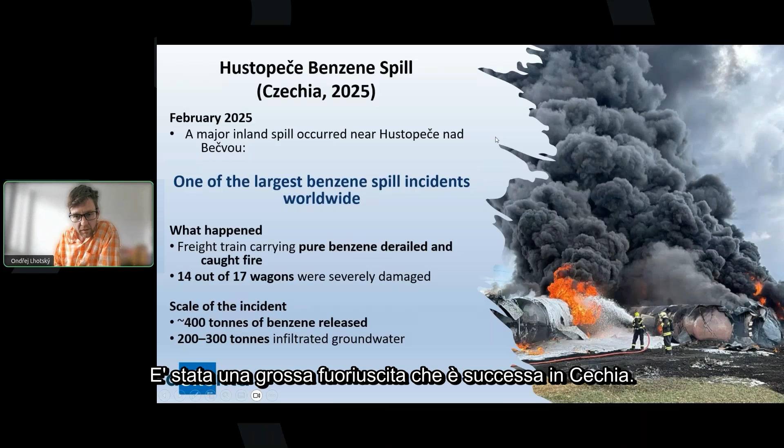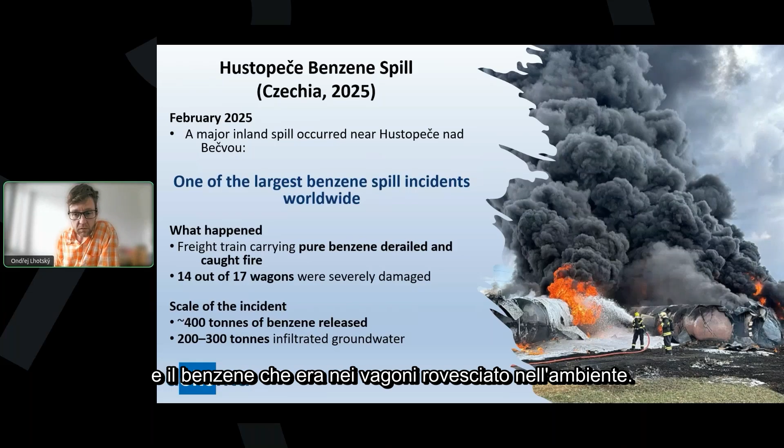It was a big spill that happened in Czechia. It happened in February 2025 when a train carrying pure benzene from the manufacturing site derailed and caught fire. 14 out of 17 wagons carrying benzene were severely damaged, and the benzene in the wagons spilled into the environment.

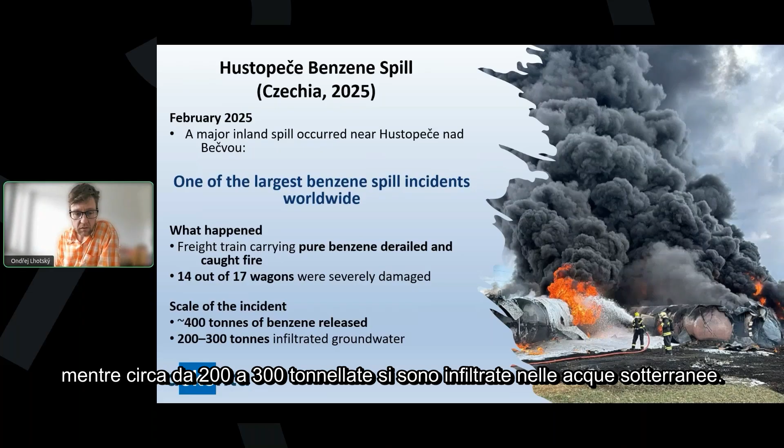The estimate is that about 400 tons of benzene were released, while about 200 to 300 tons got infiltrated into the groundwater.

This incident was actually the biggest benzene incident ever recorded in Europe, and as benzene migrated very quickly into the subsurface and into the groundwater, we've seen very early impacts of benzene in surroundings.

Benzene was detected in the nearby lake about 100 meters from the incident site already a few days after the incident. So this underground migration was extremely fast, and there was very significant risk both to human health and environment.

And that's why the DEKONTA company was called to the site by the authorities, as we are the only company in Czechia that combines both the emergency response and site remediation services.

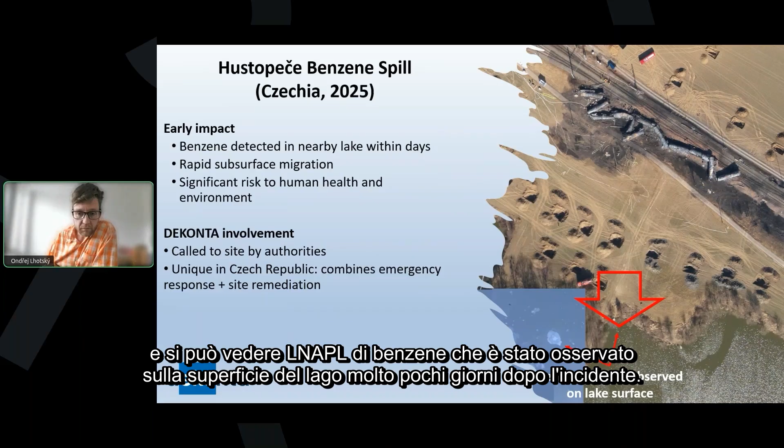On this picture on the right side, you can see the aerial view of the site where you still have the incident site, and you can see the benzene LNAPL that was observed on the lake surface very few days after the incident.

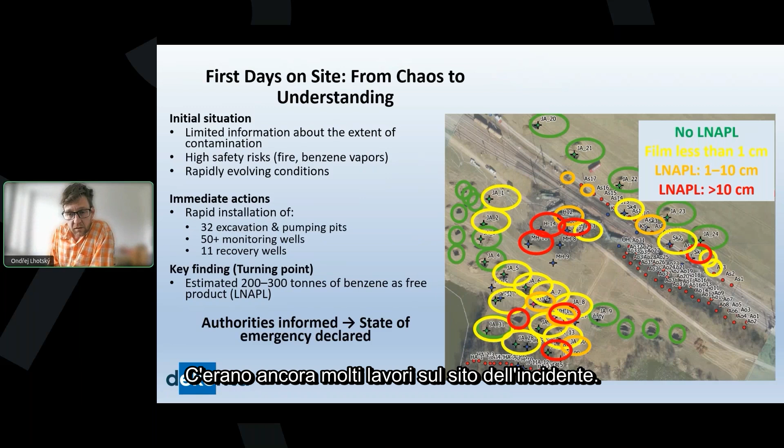We were contacted by the authorities. We came to the site, and it was a complete mess. There were still a lot of works going on at the incident site. The wagons were still present, and they were being taken care of by the National Fire Service.

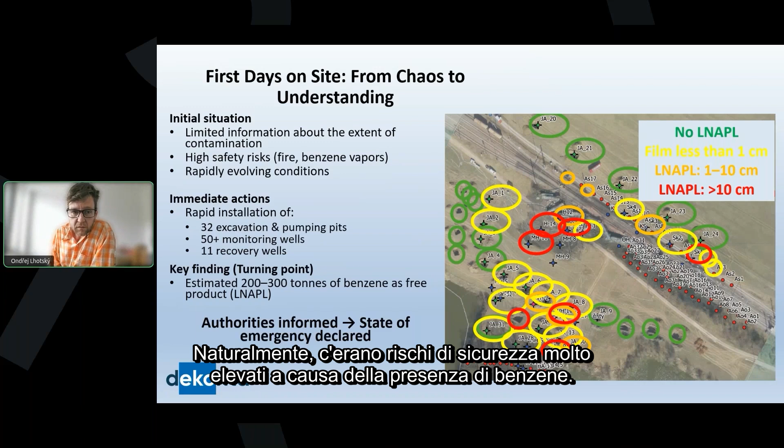And we knew that benzene was migrating towards the lake, so we needed to collect as much information as was possible. Of course, there were very high safety risks due to benzene presence. Benzene is, of course, very toxic. It's actually carcinogenic, and its vapors are highly flammable, with a high risk of explosion.

So the early days on the site were very hectic, and we had to use all the protective equipment that can be used in such cases. In addition to that, the situation was evolving very quickly, so we needed to assess the situation and get all the information possible as soon as possible.

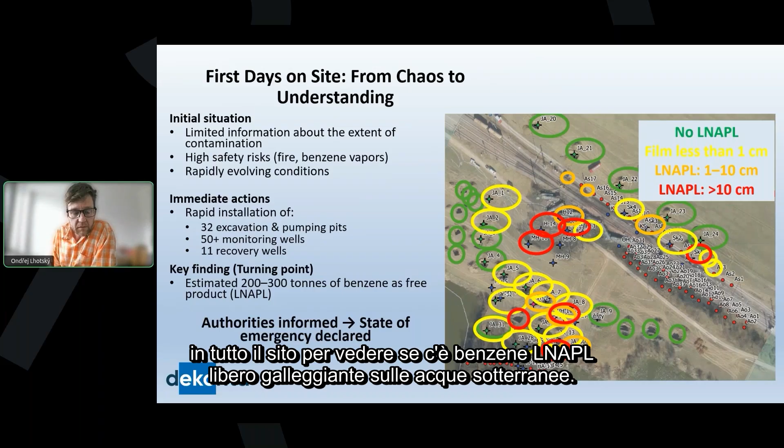And we decided to do that via excavation and installation of combined survey and pumping pits throughout the site to see if there is free benzene LNAPL floating on the groundwater. Of course, we also started installing monitoring wells, and we already started also with installation of some recovery wells.

The main finding we had after several weeks was this estimation that there is about 200 to 300 tons of benzene present, floating on the groundwater in form of LNAPL. And we informed the authorities about this.

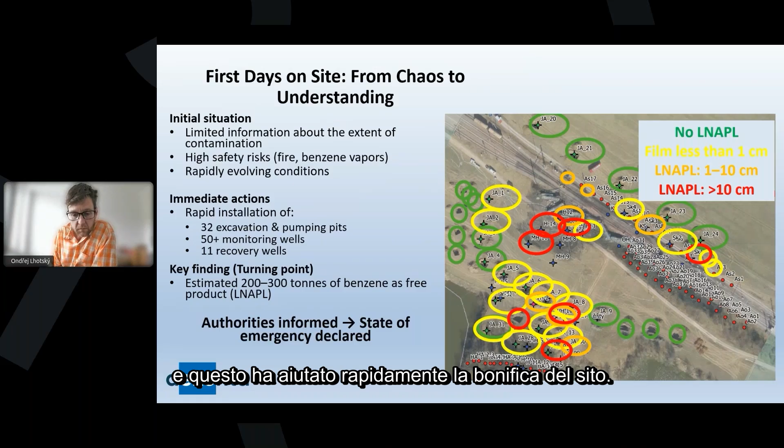And later on, the state claimed a so-called state of emergency, and this helped rapid remediation of the site.

As Jack mentioned, this was not a typical oil spill. The properties of pure benzene are, of course, different compared to normal oil. It's highly volatile, toxic, and explosive, as I mentioned, so there were very high risks for the site personnel, and it has also very high mobility in the subsurface.

Its sorption on the soil materials is relatively low, and it has very low viscosity. And speaking about organic solvent, it has relatively high solubility, so it was rapidly partitioning into the groundwater.

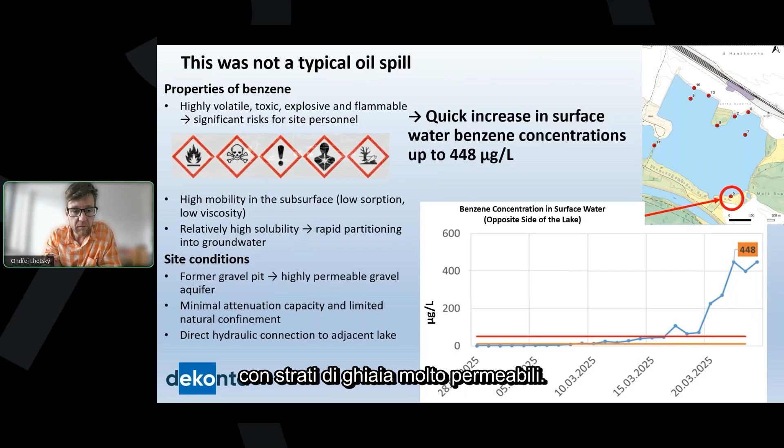In addition to that, the site conditions were very favorable for a very quick mobilization or flow of the benzene in the subsurface, as the site was actually a former gravel pit with very highly permeable gravel aquifers. It had minimal attenuation capacity, and there was direct hydraulic connection to the adjacent lake.

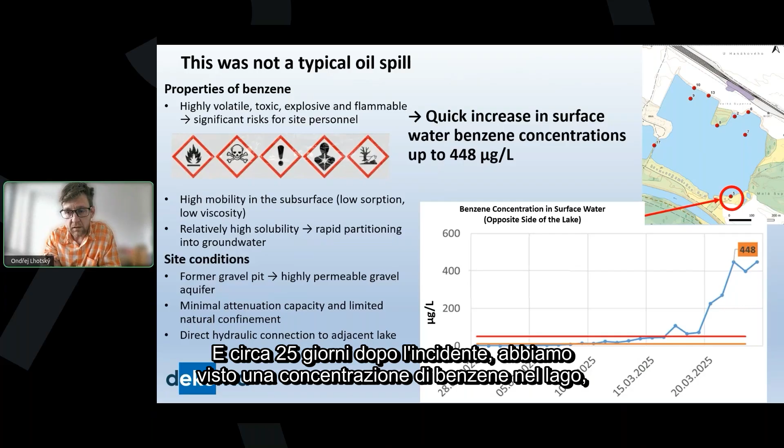This quick increase or quick migration of benzene into the lake resulted in a quick increase of benzene concentrations in this lake, and about 25 days after the incident, we've seen a benzene concentration in the lake around 450 micrograms per liter.

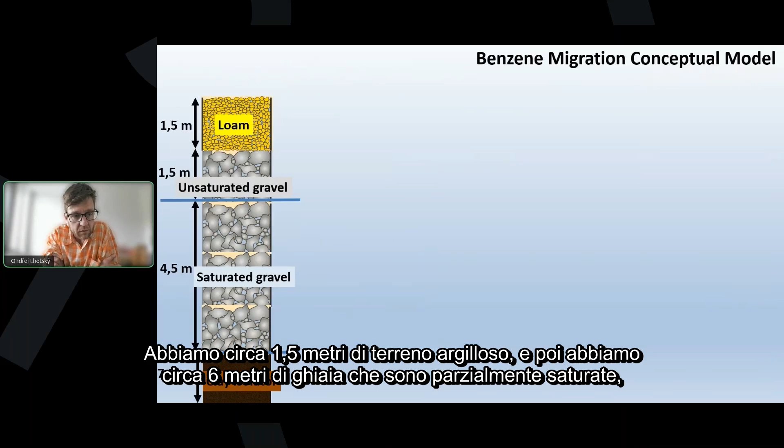Just to explain how this could have happened, here is a short presentation of our benzene migration conceptual model. On the left hand, you can see the geology of the site. We have about 1.5 meters of loam, then about 6 meters of gravels that are partially saturated, and then a clay insulator.

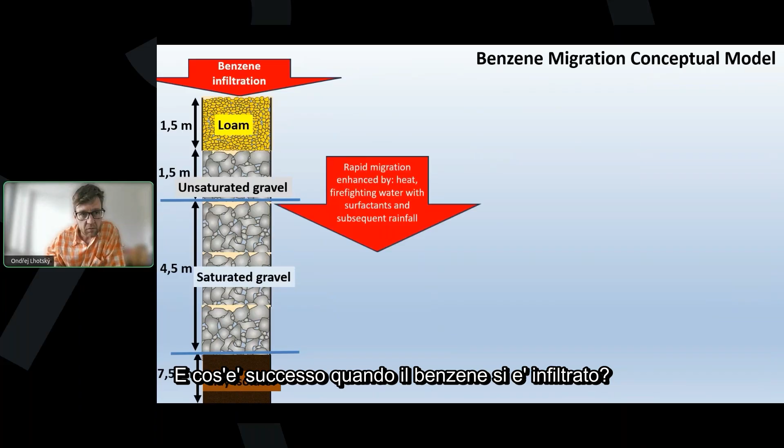What happened when benzene was infiltrating, we had huge benzene lagoons close to these wagons, and this benzene was rapidly migrating downwards, not only because of its gravity, but also because of elevated heat caused by the fire and firefighting water and surfactants that were sprayed over these lagoons, which were basically pushing the benzene level downwards.

Then when benzene reached the groundwater level, it accumulated there and created a free product layer, and part of this layer was dissolving into the groundwater, but it was also floating along the groundwater table downwards, dissolving into the groundwater also along the way.

So it was spreading very quickly towards the lake, mainly in form of free product, but also in form of solution in groundwater.

The groundwater migration towards the lake is also quite significant, but it's not as quick as the migration of pure free product on the water table.

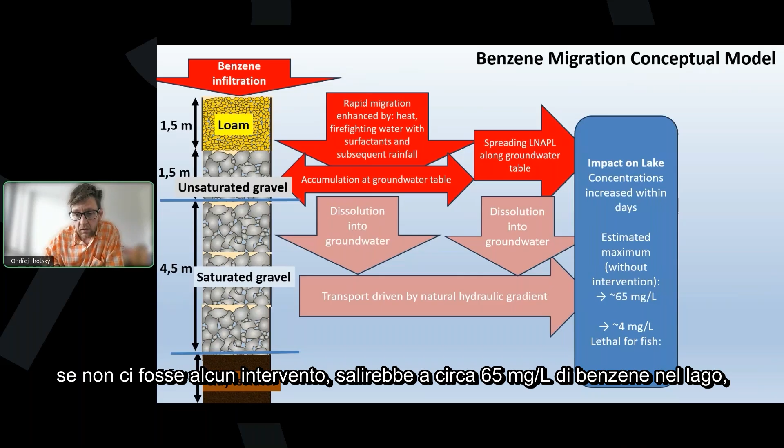And when this benzene got into the lake, it got dissolved in there. We estimated that the maximal concentration of benzene in the lake, if there was no intervention, would go up to about 65 milligrams per liter, while already about 4 milligrams per liter are lethal to fish. And the spreading, as I mentioned, was very quick.

We've seen benzene in the lake spread about 100 meters in very few days. And then this lake is connected to another lake and then to a river ecosystem, and there would be quite significant downstream impacts on these as well.

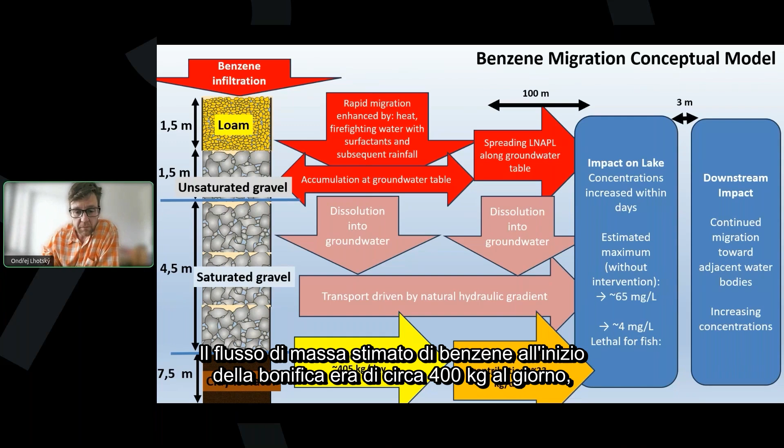The estimated mass flux of benzene at the beginning of the remediation was about 400 kilograms per day, and the secondary source migration was around 23 kilograms per day. And then we would have migration of about 4 kilograms per day to the downstream area.

We presented this uncontrolled migration scenario to the authorities. We warned them that the surface water in this first lake can increase up to 65 milligrams per liter, which would cause actually acute toxicity not only to the lake environment, but it would also be toxic in the surroundings, as benzene will evaporate from the lake and there will be toxic vapors all around.

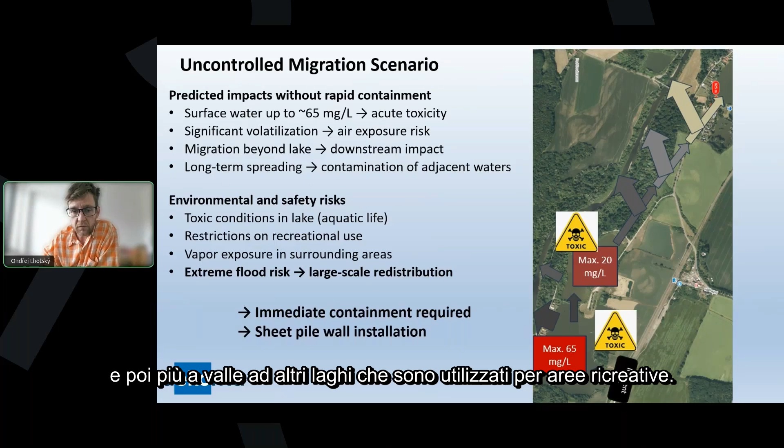And it was clear that even the downstream lakes will have very high benzene concentrations and will become toxic. And there was a potential that the benzene will also migrate into the nearby river and then farther downstream to other lakes that are used for recreational areas.

So the risks were very high, and there was another huge risk that there will be floods coming, and this flood risk would cause large scale redistribution of all the benzene that was present downstream, with potentially very disastrous results.

So it was decided that there is immediate containment necessary to stop the migration of benzene downwards. And we decided that we will install a sheet pile wall on the site to prevent the downstream migration.

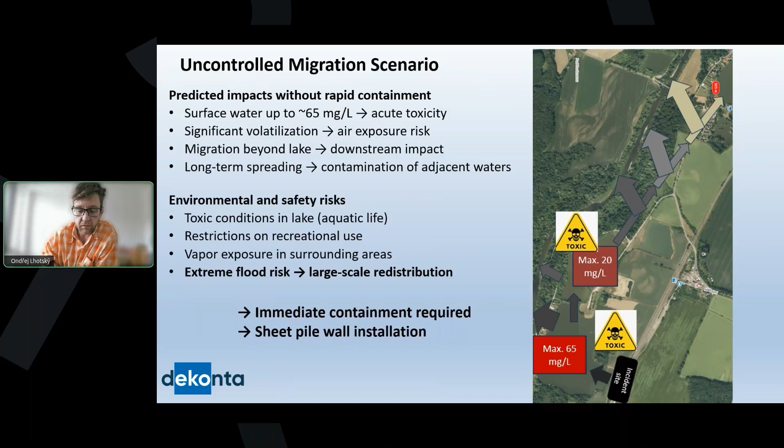This sheet pile wall installation started already in March, and it was finished after 43 days after the incident. It was extremely quick. The sheet piles were taken to the site from all around Europe, and the sheet pile wall was installed in order to contain the majority of the benzene contamination present on the site.

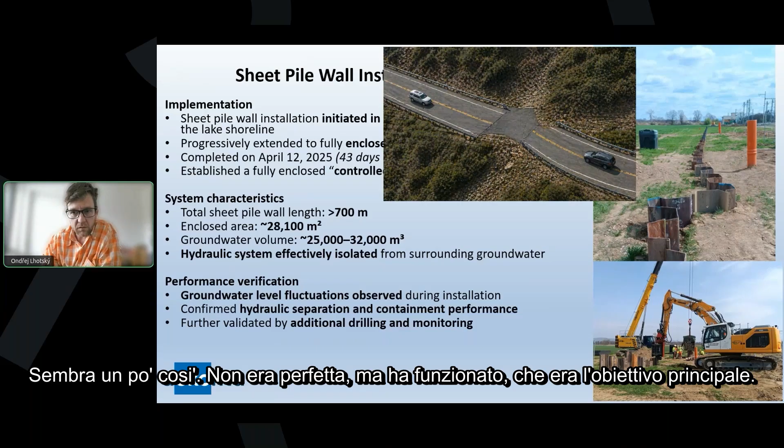This sheet pile wall length was about 700 meters, and the enclosed area was around 28,000 square meters. The groundwater volume inside this controlled area was around 25,000 to 32,000 cubic meters, and we knew that the hydraulic system inside was effectively isolated from the surrounding groundwaters.

We also knew that there were different groundwater levels outside and inside the sheet piles, so the performance of the sheet piles was verified, and we confirmed that the sheet piles worked as a containment for the benzene LNAPL, although they don't seal 100%. There is still some groundwater migrating through the sheet piles. The LNAPL migration was basically stopped thanks to the sheet pile installation.

Concerning the mass balance that we did after the sheet pile wall installation, we've estimated that we had about 220 to 400 tons of benzene captured in the controlled area. This means that about 96% of benzene that was released was contained inside this controlled area. When we looked at the distribution of the contamination, a majority of it was present in the form of LNAPL that was gradually dissolving into the groundwater. Only about 10% was present dissolved in the groundwater at the time, and we had 10 to 15% retained in the soils.

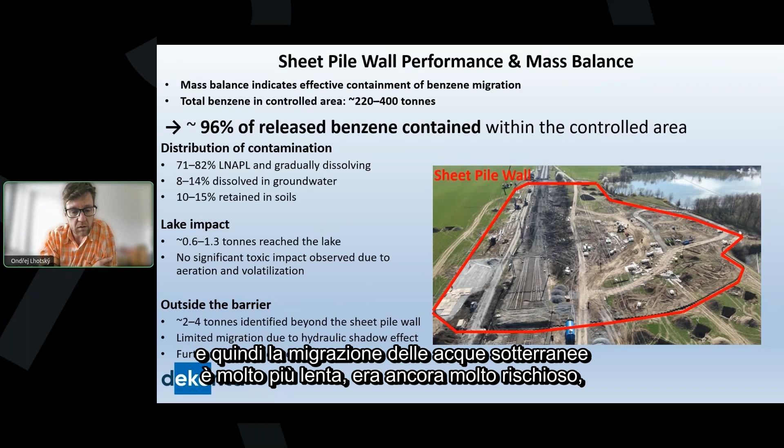In addition to that, we knew that there were about 2 to 4 tons of benzene that migrated downgradient from the controlled area before the sheet pile wall was installed. Although further migration was limited thanks to the so-called hydraulic shadow effect of the sheet piles, basically shading the groundwater downgradient so the groundwater migration is way slower, it was still a very high risk, and we knew we had to investigate this issue further.

We were also asked by the authorities to prepare a so-called emergency remediation strategy, basically a document that will guide us through the remediation. We developed it very quickly, within about 7 days. At the beginning, it was intended to last for 6 months, but now the remediation was extended to 20 months, and there will be follow-up remediation projects prepared later on.

The key objectives of this emergency remediation strategy were mainly, of course, containment of the benzene and effective benzene removal from the groundwater, and mainly the benzene that was floating in the form of LNAPL on the groundwater, but it was also important to rapidly restore the railway and to investigate and monitor the site in detail. We also wanted to minimize both the environmental and financial risks and optimize the remediation efficiency.

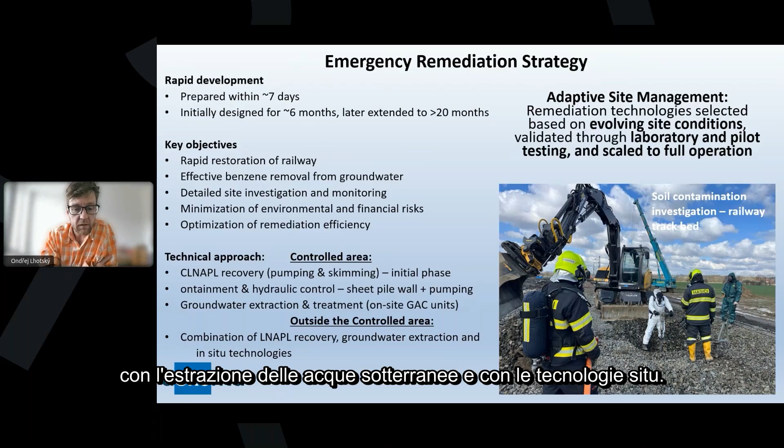In the areas outside of the controlled area, we decided to combine LNAPL recovery where LNAPL was present, groundwater extraction and in situ technologies. And we tried to focus on adaptive site management. We proposed that we will think about different technologies that can be used on the site based on its evolving conditions, validate these through laboratory and pilot testing, and then scale them up to full operation.

So the first thing I will touch on briefly was soil contamination and the railway restoration. Basically, what we found was that luckily the highly contaminated soil layer beneath the railway was relatively narrow, and the amount of soil that needed to be excavated was relatively small. So we basically moved this contaminated soil to the site where the soils were highly contaminated, where the lagoons with benzene were present earlier, and we covered these contaminated soils with bentonite and left it on the site.

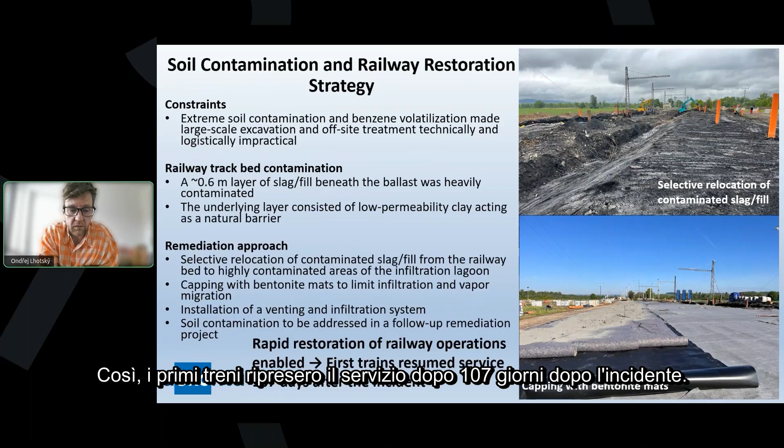Concerning the LNAPL recovery and pumping, we were directly pumping the benzene from our excavation pits and later our recovery wells, and we were combining the pumping with skimming to enhance the amount of recovered LNAPL, and we transported the recovered benzene to the producer facility where the benzene was produced originally. It's actually only 10 kilometers away, so it was quite convenient for us to transport it there.

There were, of course, a lot of operational challenges, as the benzene LNAPL created emulsions with the groundwater, a sort of milk-like looking liquid, and there were high safety risks during the handling and disposal of the benzene, of course. But within about a month, we were able to pump out the majority of LNAPL that was present on the site, and to remove about 100 tons of LNAPL, and the rest of the LNAPL was quite quickly dissolving into the groundwater, and it was not really possible to pump it out anymore.

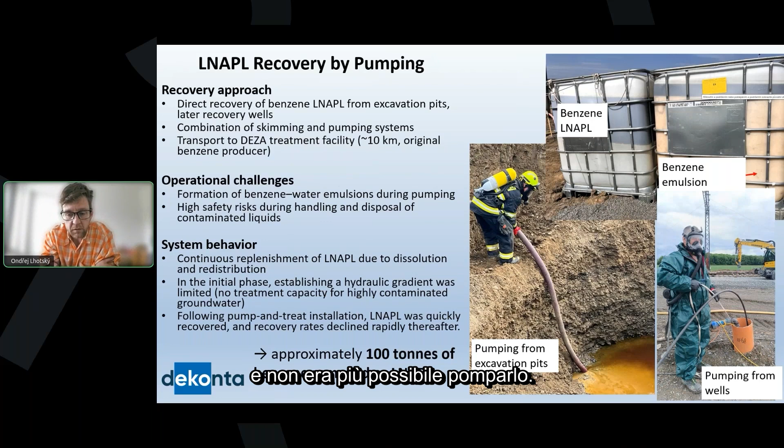Concerning the pump and treat system that was installed on the site, there were about 70 extraction wells installed in the controlled area, and they were used periodically to pump the groundwater with dissolved benzene out, and this water with very high benzene concentrations was treated on high capacity granulated activated carbon filters. We had 3 filters on the site, or we actually still have them there. Each unit contains about 20 cubic meters of activated carbon, which is about 10 tons.

And we are always pumping the highly contaminated groundwater through the first filter, the so-called high load filter. Then we polish the groundwater in the second filter, that is installed in series after the first filter, and then the last filter is on standby. It's actually empty, and every time our high load filter gets fully saturated by benzene, there is a car coming that brings new, fresh, reactivated granulated activated carbon. This carbon is injected into the standby filter, and the contaminated activated carbon is pumped out from the high load filter, and it's taken to Austria for reactivation, and we can continue pumping.

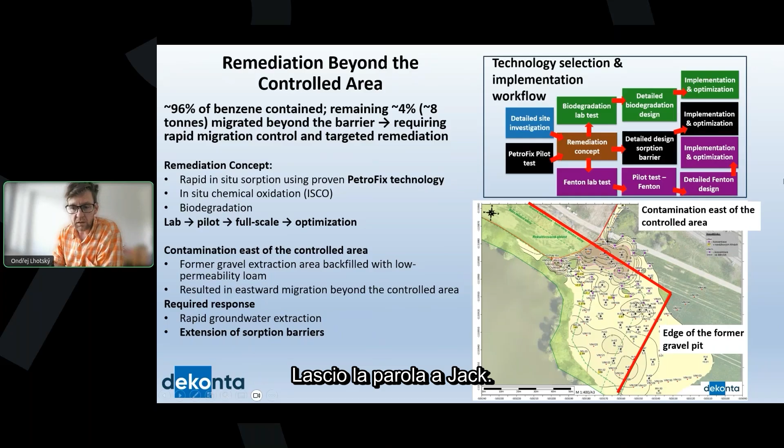What we didn't know earlier was that there was some contamination present also in the east area of the controlled area, as the former gravel extraction area was bigger than the current lake, and the gravel was excavated in these areas as well, and then it was backfilled with low permeability loams, and this resulted in eastward migration of benzene also this way. So we were also asked to rapidly react to this situation and to extend the sorption barriers we installed. And this brings me to Jack.

And then as different parts of the site required different technologies to essentially stop the spreading and reduce the risk posed by this spill, this is where colloidal activated carbon, of which PetroFix falls under that umbrella, came into the wider remediation strategy. So the part of the talk I'm going to do is just introduce you to this concept of colloidal activated carbon, the product PetroFix, and then how it works in the subsurface once it's been applied. So colloidal activated carbon is typically applied through direct push injection, or you can inject it into fixed injection wells as well.

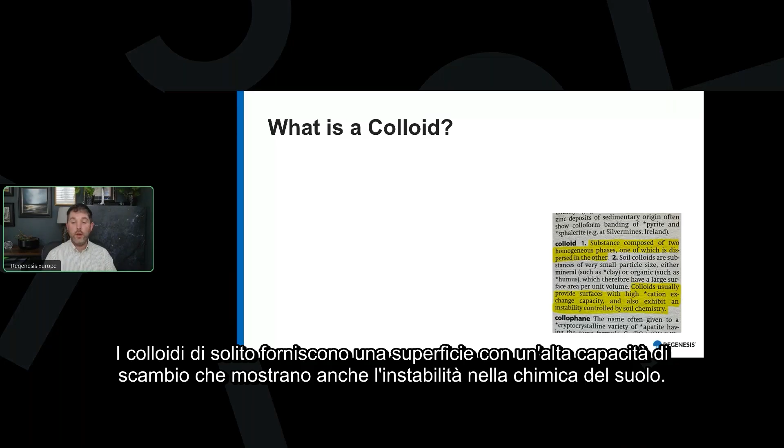So I'll start off with what is a colloid. A colloid can be defined as a substance composed of two homogeneous phases, one of which is dispersed in the other. So colloids usually provide a surface with a high cation exchange capacity that also exhibit instability in soil chemistry. So there's three types of mixtures: one is a solution, one is a colloid, and one is a suspension. The size of the dispersed phase for a colloid can be between 1 to 100 nanometers. Particles are often invisible to the naked eye and will only settle upon centrifugation, and these particles diffuse slowly.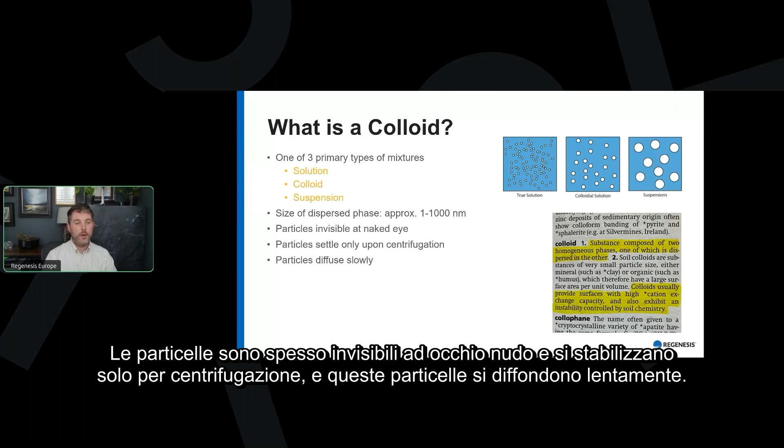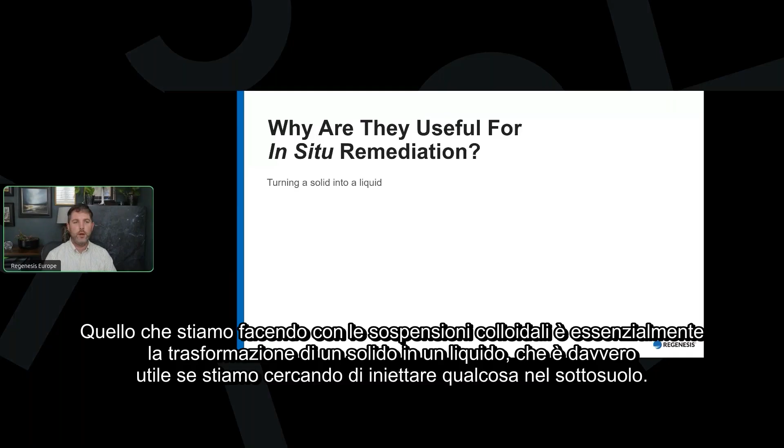Now, within our lives, we come across colloids all the time. So ink is a colloid, milk is a colloid, paint is a colloidal suspension, as is wine as well. So if you're thinking of colloidal activated carbon, it's something that looks very much like ink. It's something that looks very much like black coffee. So why are they useful for in situ remediation? So what we're doing with colloidal suspensions is essentially turning a solid into a liquid, which is really useful if you're looking to inject something in the subsurface. You want something that's going to really distribute well in the subsurface.

So we take a solid ingredient, and for our colloidal activated carbon range, we grind that down to 2 microns. So 2 microns is about the width of a red blood cell. So it's smaller than a pore throat in sand or silt. That isn't the end though, because you do not want these colloids to agglomerate. You don't want them all to stick together to clog up those pore throats. So we add a proprietary dispersing agent. So this ensures product consistency for storing and transport.

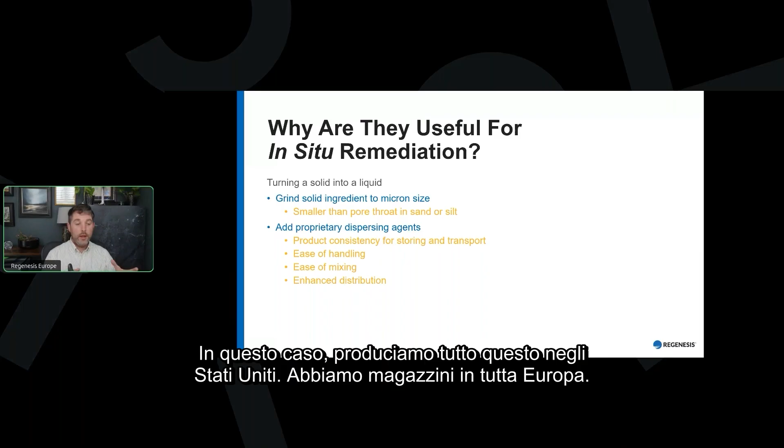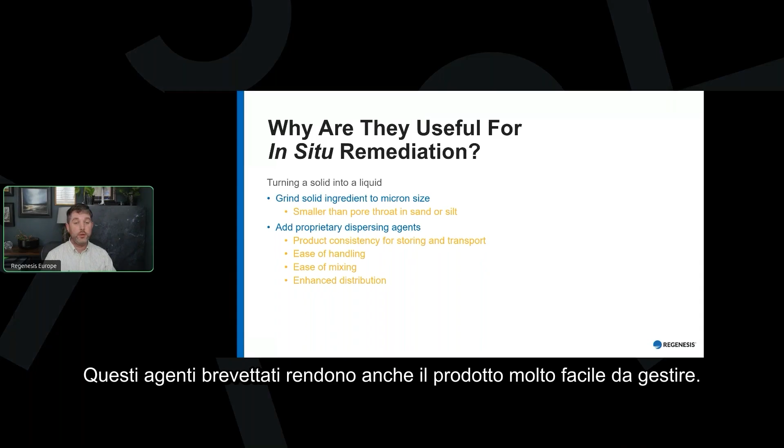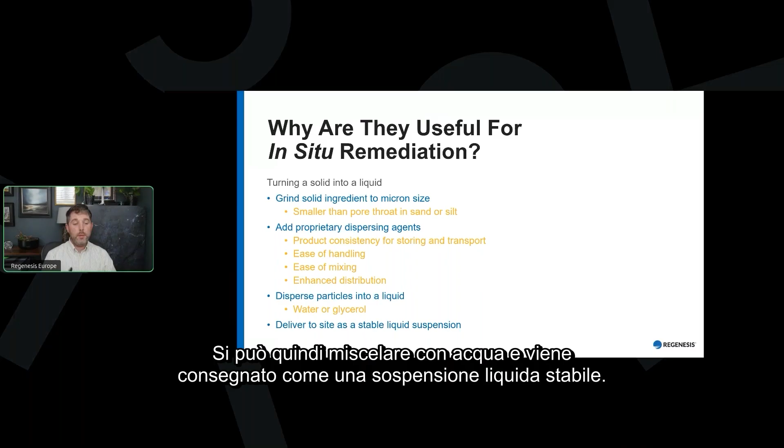So this proprietary dispersion agent coats these activated carbon particles that are 2 microns across, and that gives them all a slight negative charge, so that they repel each other, but they then stick to the aquifer matrix. You can then mix it with water, and then it's delivered as a stable liquid suspension.

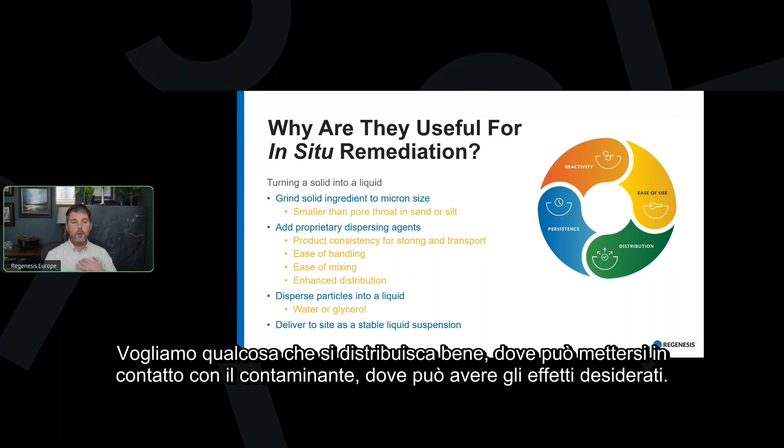So they're useful when it comes to in situ remediation, because when you're looking at different compounds that you might want to inject into the ground, I always think these are the 4 things you need to be considering. First of all, you need something that's going to distribute really well. We don't want to have a really dense injection grid. We want something that's going to distribute well, where it can make contact with the contaminant, where it can have the desired effect. So you want something that's going to distribute widely in the subsurface.

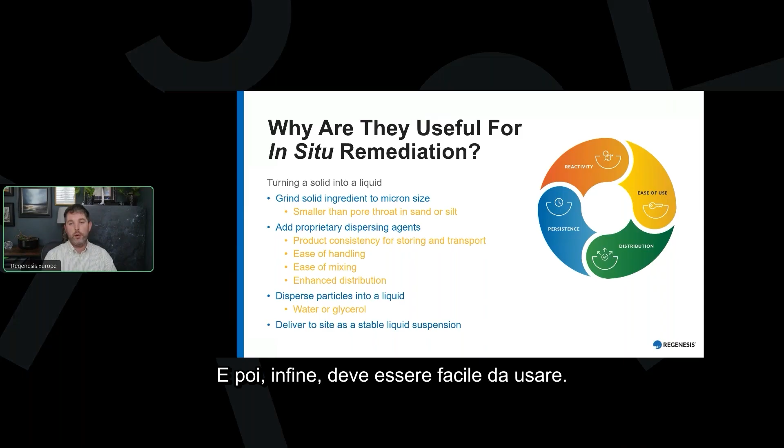You then want it to be persistent. So you need it to not wash out. You need it to stay where you've injected it, but then it also has to be appropriately reactive as well. And then finally, it's got to be easy to use. You know, for anybody that spent time in the field, ease of use on site is really important. And I also think ease of use and safety in the field is also important. So you want something that's safe and easy to use.

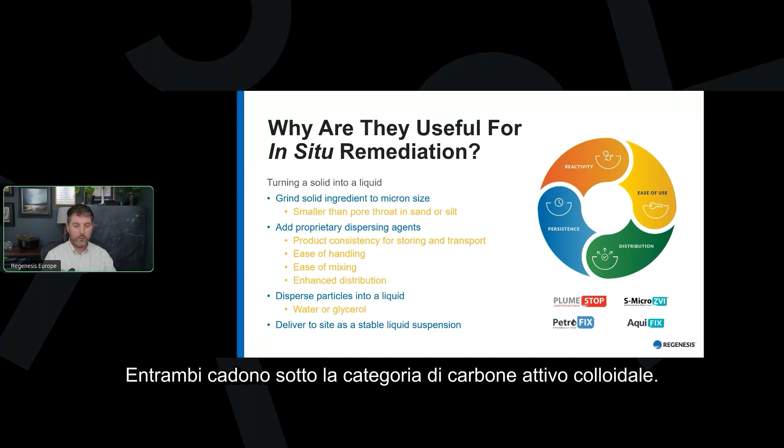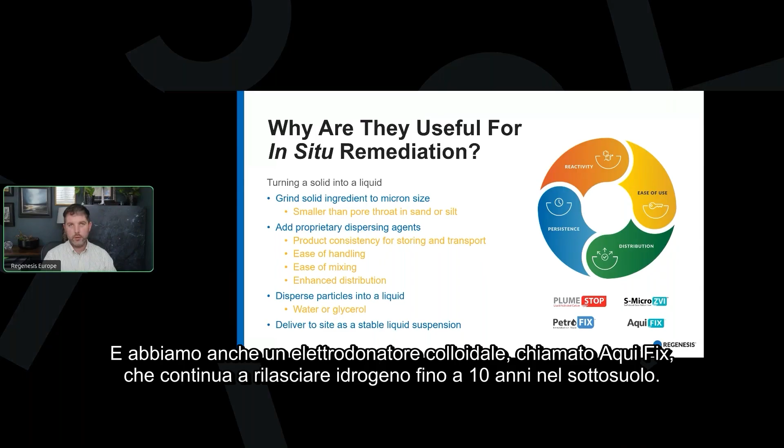So in Regenesis, we have a range of different colloidal technologies. So we have PlumeStop and PetroFix. PetroFix is what I'm going to be talking about as part of this presentation. They fall under the umbrella of colloidal activated carbon. We also have other colloidal technologies. So we have a colloidal zero valent iron technology called S-MicroZVI for in situ chemical reduction applications. And we also have a colloidal electron donor as well called AquiFix that continues to release hydrogen for up to 10 years in the subsurface. All of these are colloids.

Two of our products, PlumeStop and PetroFix, are colloidal activated carbon. We're going to focus on PetroFix because it was used on this site and it's used to treat petroleum hydrocarbons in the subsurface, where typically PetroFix is used for in situ adsorption and anaerobic biological degradation. In the case that Andre is discussing today, they actually went down the aerobic route with benzene.

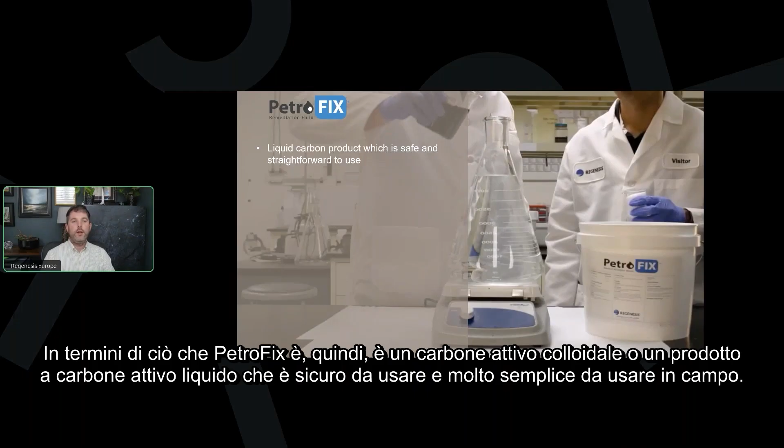In terms of what PetroFix is, it's a colloidal activated carbon or a liquid activated carbon product that is safe to use and very straightforward to use on site. So as I said, we've milled granular activated carbon down to 1 to 2 microns, coated it in a dispersion agent so that when you inject it into the subsurface, it distributes really widely. It's a very adaptable product. So in this case, it was used in a barrier application. Sometimes it's used to treat sources. At other times, it's used down service runs to stop offsite migration.

It provides really fast results. So it's used quite frequently in the spill response industry to stop the spread and reduce the risk of continued migration of contamination. And typically it's applied on sites where your hydrocarbon concentrations are at or near solubility limits, okay? What it can't do is it can't stop surface migration. So this isn't like a boom that you can just spray on the ground and stop surface migration. And it also cannot stop free phase either.

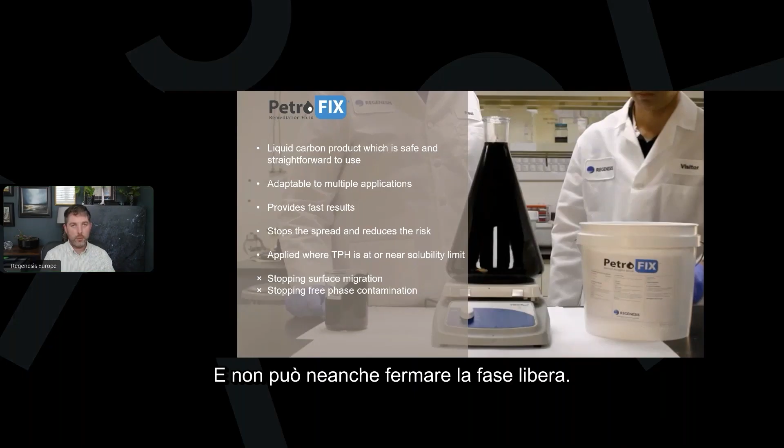And this is why, as Andre was talking you through this remediation strategy, where you do have free phase, some sort of pump and treat, some sort of excavation, some sort of stabilization is much more appropriate than using this technology. But it is a non-hazardous substance. So it's a very safe product to use in the environment. It's essentially made of the same stuff that's in your water filters at home. But we're not just using activated carbon to adsorb and fix contamination. We can also use it to enhance biological degradation as well.

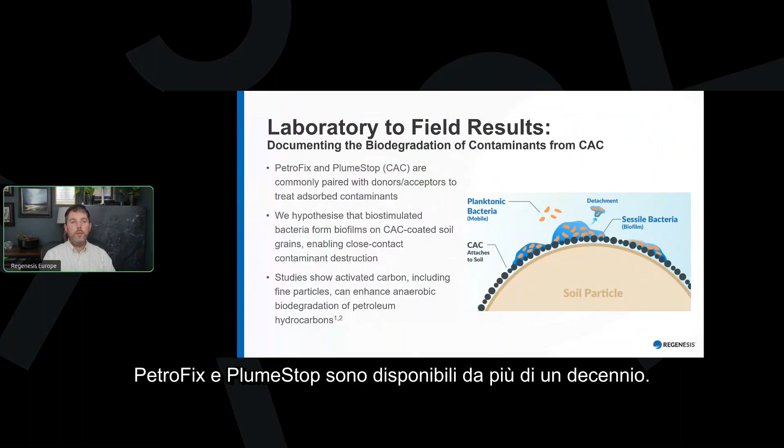PetroFix and PlumeStop have been out now for over a decade. And there's lots of instances that show how colloidal activated carbon, commonly paired with electron donors or acceptors depending on what you're treating, can accelerate biological degradation. Essentially, we hypothesize that biostimulated bacteria form these biofilms that coat the colloidal activated carbon, enabling close contact between that adsorbed contamination and the bacteria looking to break it down. And there's multiple studies that highlight this.

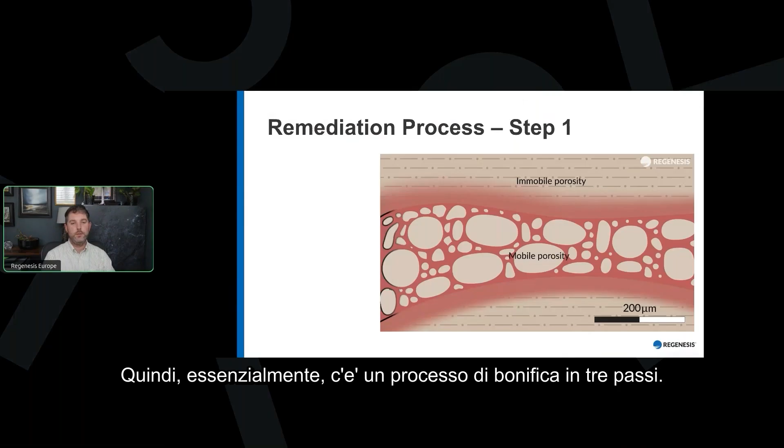We have probably hundreds of case studies that we can draw on, looking at not only petroleum hydrocarbons but chlorinated solvents, that show when you treat sites with colloidal activated carbon, pair it with an electron donor or acceptor, or rely on ambient electron donors or acceptors, you get enhanced biological degradation. So essentially, there's a 3-step remediation process.

The first is adsorption. So you inject the colloidal activated carbon into the subsurface, and you're looking to paint the subsurface with a 2-micron layer of activated carbon. So we're coating all of the sand grains and silts with this 2-micron layer of activated carbon. What that does, it will rapidly remove dissolved phase contamination from the groundwater and adsorb it onto the soils.

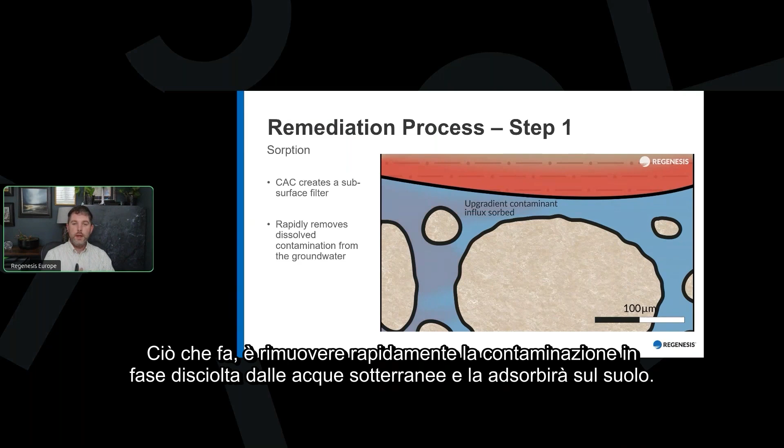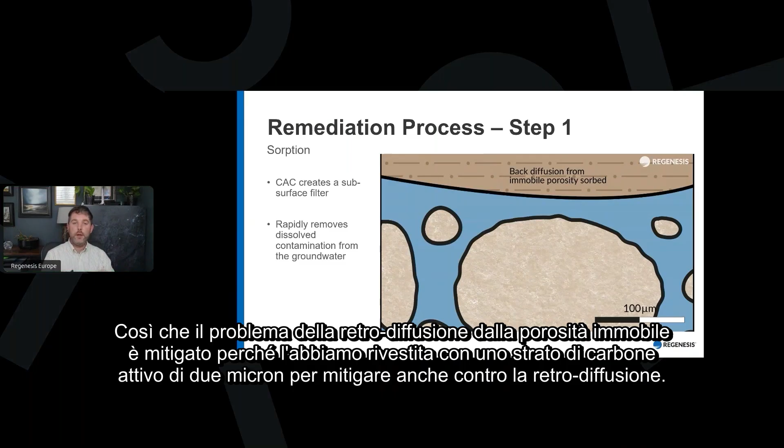Also, what can be important, particularly if you have low targets that you're looking to hit, is it will also coat your immobile porosity as well. So that problem of back diffusion from your immobile porosity is mitigated because we've coated it with a 2-micron layer of activated carbon.

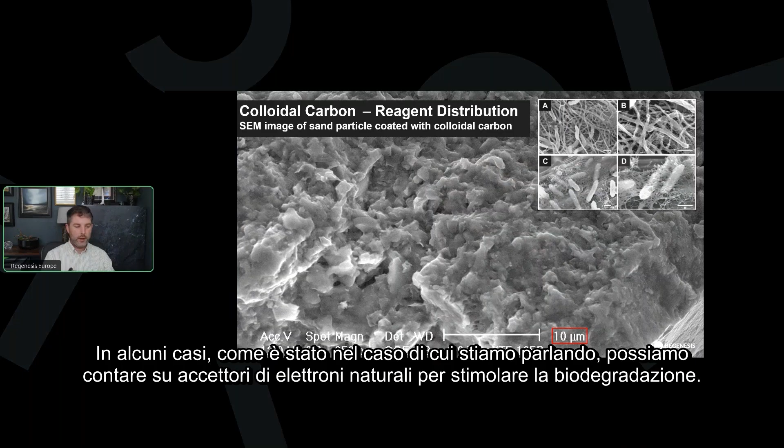Essentially, then, what's going on is we've coated those sand grains with this 2-micron layer of activated carbon. In some cases, as was the case that we're talking about here, we can rely on natural electron acceptors to stimulate biological degradation. But in other cases, we can also pair it with an oxygen releasing compound, something that we have called ORC, to promote aerobic biological degradation. Or PetroFix also comes with a blend of sulfates and nitrates to accelerate anaerobic degradation of petroleum hydrocarbons in situ.

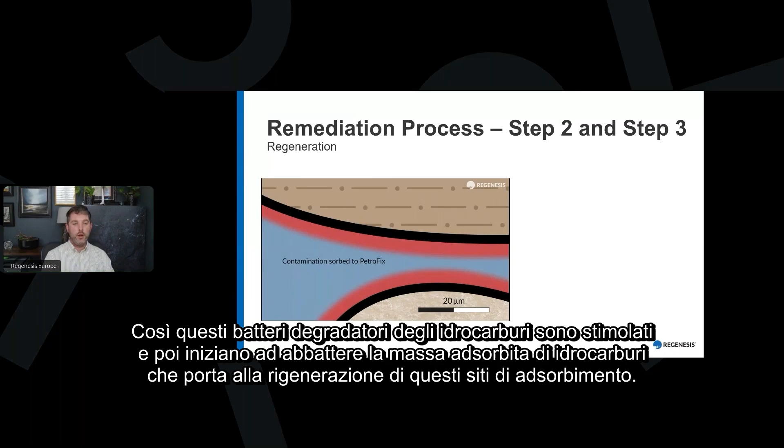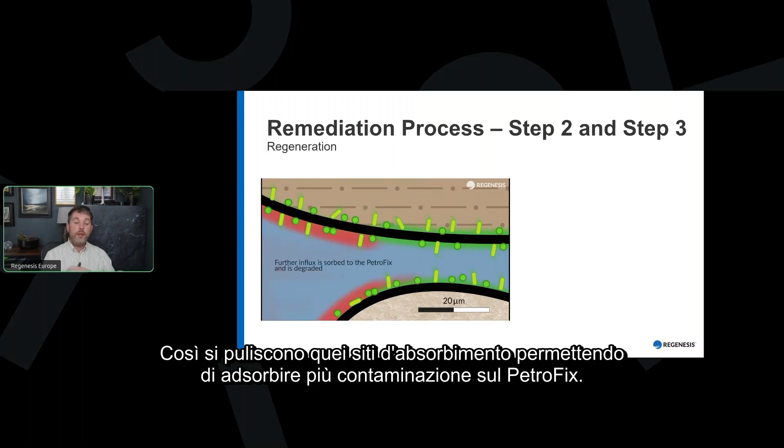So what happens when you then have this biological degradation? You then have this 2-step process of regeneration of these sorption sites. So this petroleum degrading bacteria is stimulated, and then it starts to break down that absorbed petroleum hydrocarbon mass that leads to the regeneration of these sorption sites. That then cleans off those sorption sites. That then allows more contamination to be absorbed onto the PetroFix, and then it can be degraded. So in some cases, you can create this self-cleaning filter that can be stimulated either through aerobic or anaerobic bioremediation to regenerate those sorption sites, so that then further contamination can be absorbed onto the PetroFix and treated.

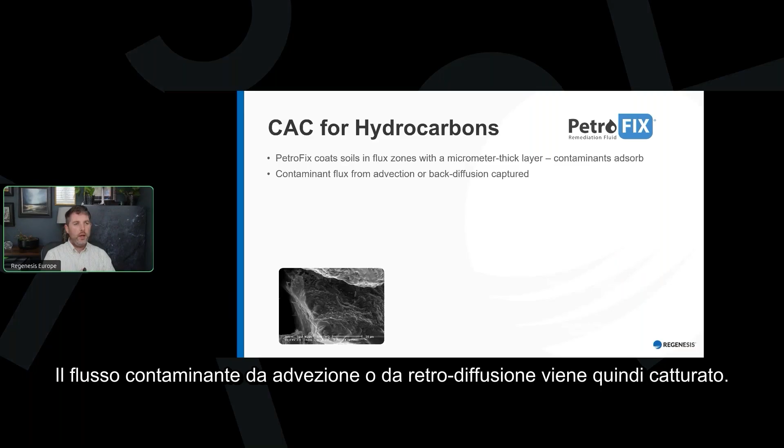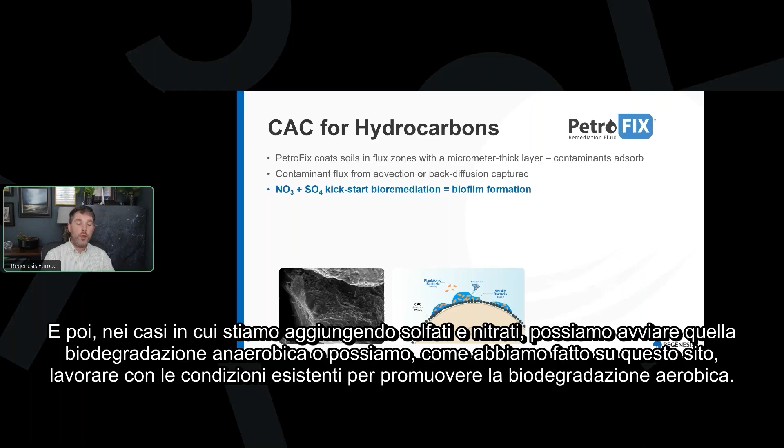PetroFix, as I say, coats these flux zones with a micrometer thick layer that then absorbs contamination. That contaminant flux from advection or back diffusion is then captured. And then in the cases where we are adding sulfates and nitrates, we can kickstart that anaerobic biological degradation, or we can, as we did on this site, work with the existing conditions to promote aerobic biological degradation. This biodegradation can lead to multi-year longevity of this particular product. So it's this case of a single injection, and then you allow this system to play out for many years.

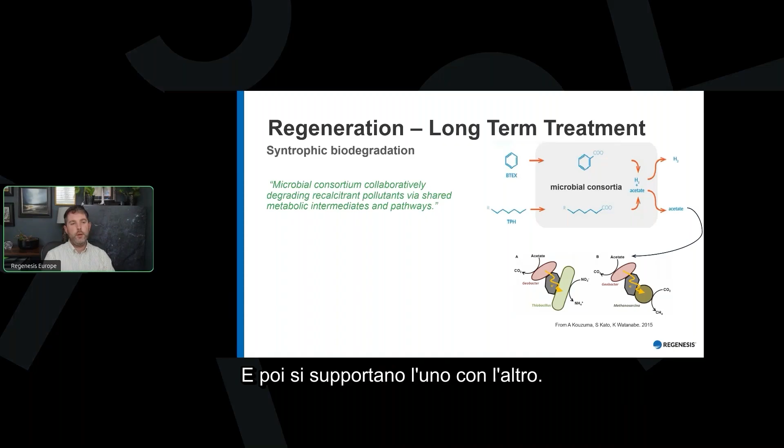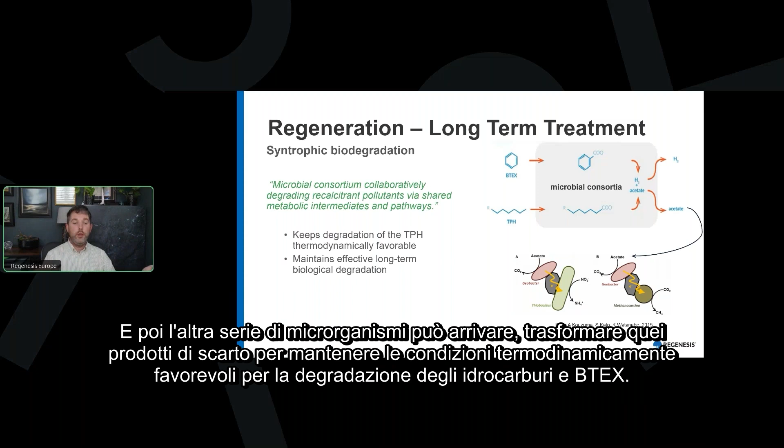You get long-term regeneration. So depending on if you go down the anaerobic route or aerobic route, you can kickstart syntrophic biological degradation, which is a process by which different microbes essentially feed with each other. So you'll have one set that break down, say, BTEX into hydrogen and acetate. What you don't want to do is to have these waste products start to build up to make conditions less thermodynamically favorable in the subsurface for TPH degradation. So another group of microbes can then come along, break those waste products down to keep conditions thermodynamically favorable for petroleum hydrocarbon and BTEX degradation. So this maintains real long-term effectiveness.

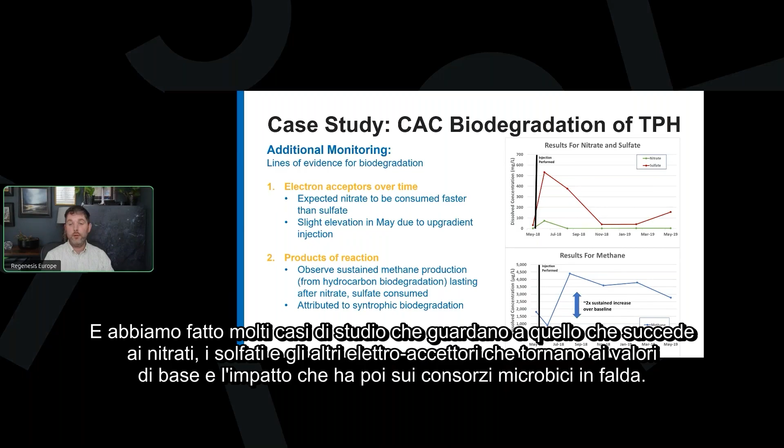We have plenty of case studies on this. This isn't from this particular site, but during the development of this product, we have lots of case studies looking at what happens as the nitrates and sulfates and other electron acceptors return back to baseline, and then the impact that it then has on microbial consortia in the subsurface. So we have papers on that. If you'd like to reach out to us in the Q&A section for papers on syntrophic biological degradation, I can absolutely forward those on to you.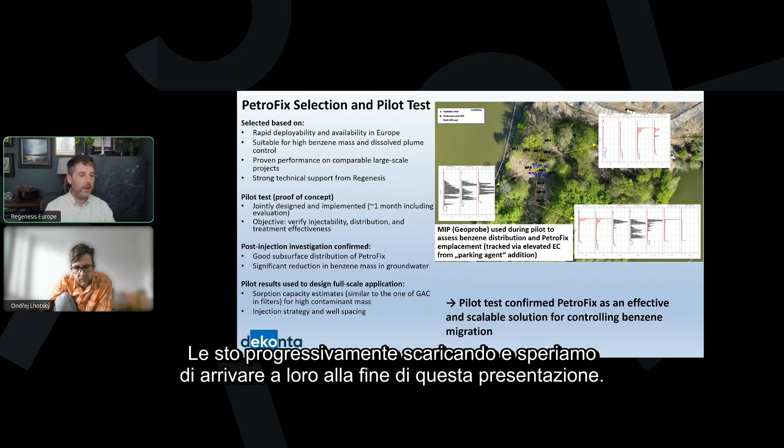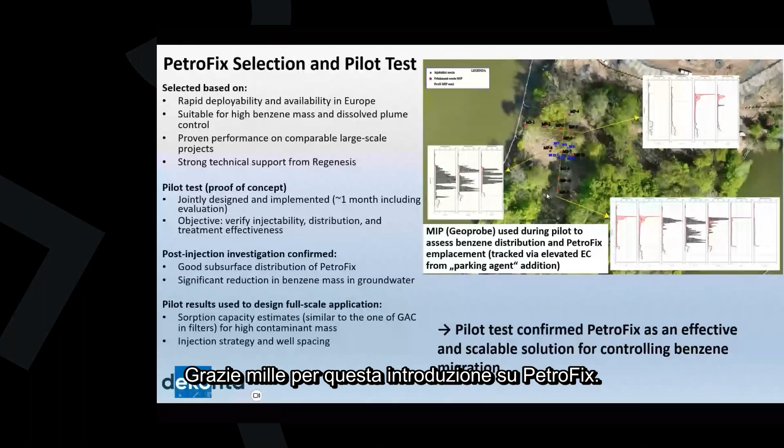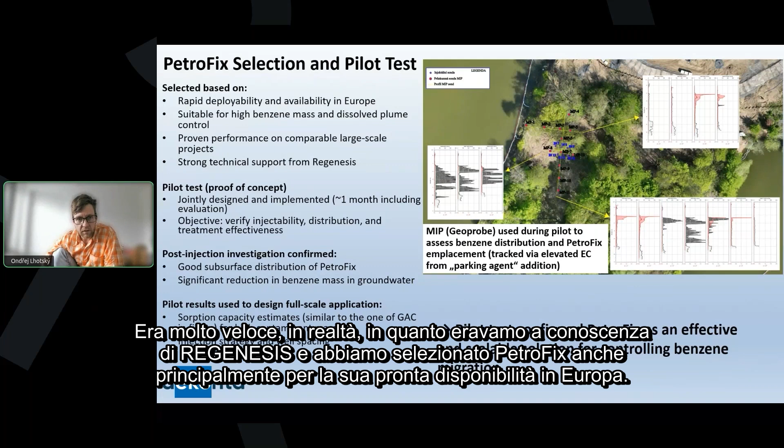Brilliant. Thanks a lot for this introduction of PetroFix. I will just briefly touch on the pilot tests we did with it. It was very quick, actually, as we were aware of Regenesis, and we selected PetroFix mainly because of its ready availability in Europe. And we knew that a high benzene mass can be sorbed on it. It had a proven performance, and there were quite a lot of results from comparable large-scale projects. And from our experience, we also know that Regenesis is capable of providing strong technical support. So we selected PetroFix for the pilot test.

This pilot test basically served as proof of concept. We designed it together with Regenesis, and after 1 month, we had clear results showing that PetroFix is an effective and scalable solution for controlling benzene migration at the Hustopeče site. And we started full-scale barrier installation.

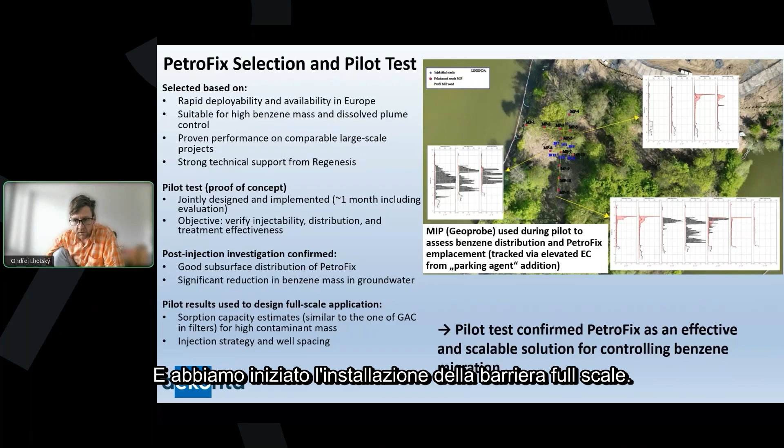In total, we injected about 49 tons of PetroFix at the end. The average amount of PetroFix per 1 cubic meter of aquifer was about 7.3 kilograms, and the total barrier length is about 680 meters. So it's a very long barrier that was installed down gradient of these sheet piles along a peninsula that is inside of this lake that is the main acceptor of benzene, and then also on the eastern part of the site.

We also had to inject a so-called parking agent as the permeability of the aquifer is very high, and we don't want the PetroFix to migrate too far from our injection wells. So we used calcium solution to keep PetroFix close to the injection wells.

On average we injected about 2 cubic meters of PetroFix suspension per injection well. What I didn't mention earlier was that in this case we decided to inject PetroFix via lines of small diameter wells that target the full gravel aquifer thickness.

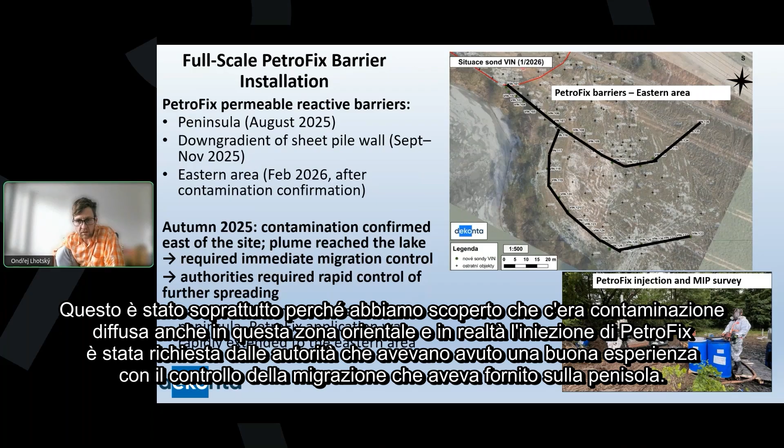This was mainly because we found out that there was contamination spreading also in this eastern area, and actually PetroFix injection was required by the authorities that had a good experience with the migration control that it provided on the peninsula.

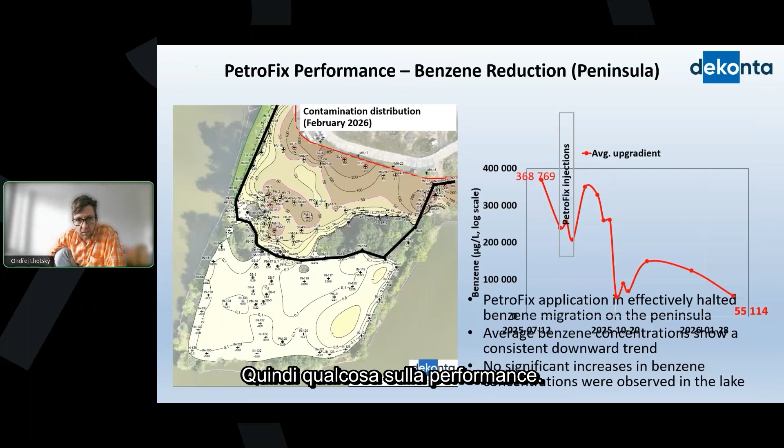Something about the performance. We've seen rapid decrease in benzene concentrations on the peninsula after PetroFix injections. You can see on a graph the results in the upgradient wells that were upgradient to the sorption barrier.

Throughout the time, we had quite significant decrease, but in case of the wells that were actually within the barrier, the decrease was way more obvious. You can see that we started at concentrations around 32 milligrams per liter, and we ended in February at concentrations around 490 micrograms per liter.

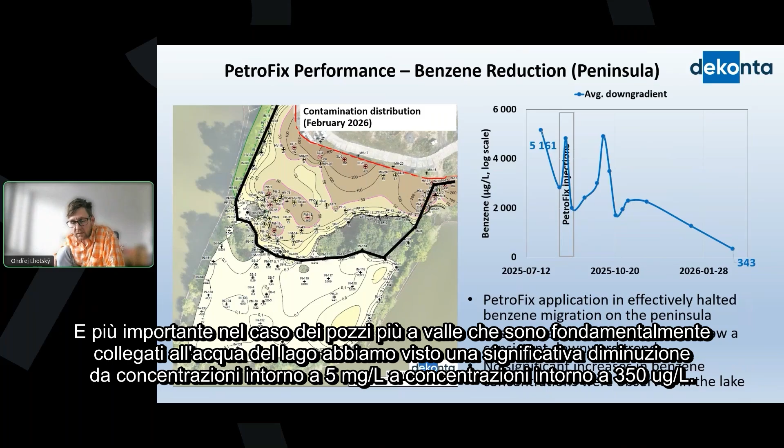And more importantly, in case of the down gradient wells that are basically connected to the water of the lake, we've seen a significant decrease from concentrations around 5 milligrams per liter to concentrations around 350 micrograms per liter. So we conclude that PetroFix application effectively halted benzene migration on the peninsula, and benzene concentrations show a consistent downward trend, and we did not see any significant increases in benzene concentrations in the lake.

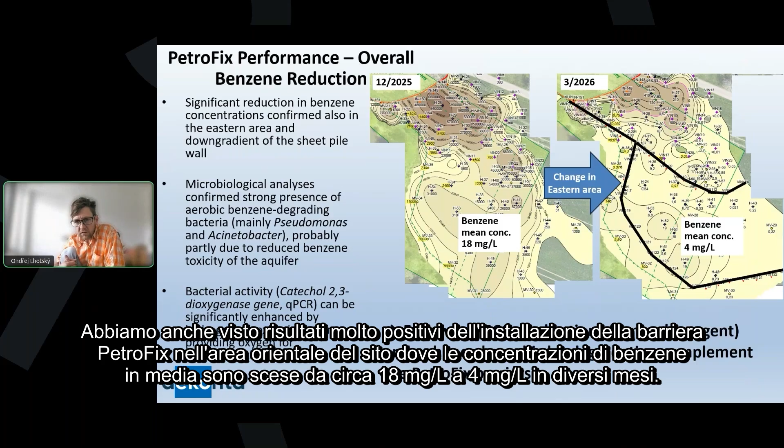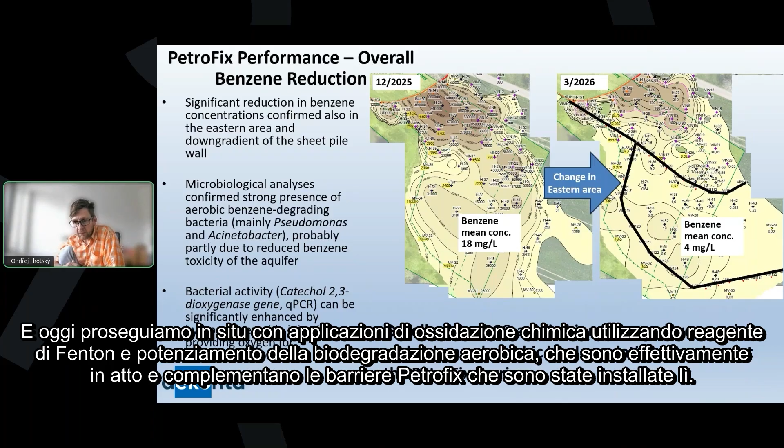We also saw very positive results of the PetroFix barrier installation in the eastern area of the site, where benzene concentrations on average dropped from about 18 milligrams per liter to 4 milligrams per liter in several months. And nowadays, follow-up in-situ chemical oxidation applications using Fenton's reagents and enhanced aerobic biodegradation are actually taking place and complement the PetroFix barriers that were installed there.

This brings me to key takeaways. For us, definitely this comprehensive site evaluation and identification of the mobile contaminant mass were crucial for prioritizing remediation strategies with authorities and making effective technical decisions. This early stage LNAPL recovery proved highly efficient in reducing the contaminant mass, and the rapid installation of the sheet pile wall was definitely a key measure that provided valuable time for follow-up remediation.

Of course, PetroFix injections successfully controlled benzene that bypassed the sheet pile containment and prevented the migration toward the lake. And these granulated activated carbon filtration units also provided a safe and highly effective solution for groundwater treatment. In our opinion, the use of readily available and proven technologies like PetroFix and granulated activated carbon filters can be strongly recommended in similar cases where a rapid response is essential.

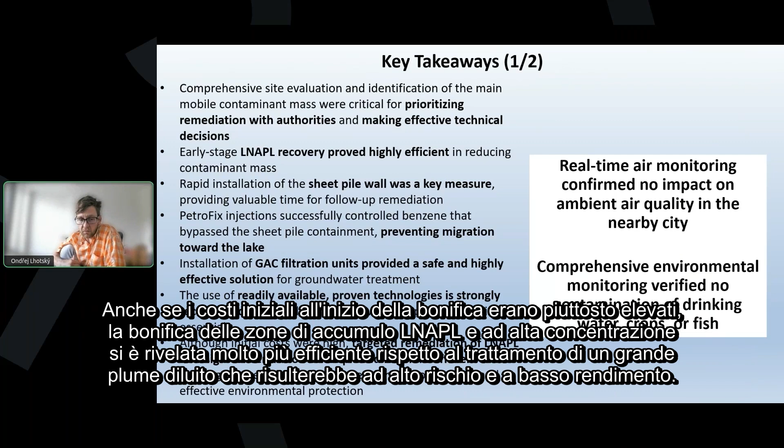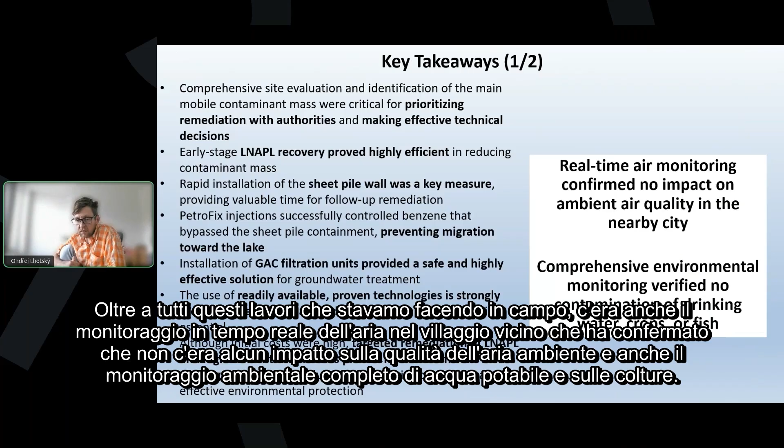In addition to all these works we were doing on the site, there was also real-time air monitoring in the nearby village that confirmed there was no impact on the ambient air quality, and also comprehensive environmental monitoring of drinking water and crops, which proved that there were no risks and no benzene was present in these materials.

The clear proof of our success in the emergency response is that there is this fishing competition held on the nearby lake, and fish health was protected, as well as the environment of the lake.

To conclude the takeaways, I think adaptive site management was critical for selecting the appropriate remediation technologies under rapidly evolving site conditions.

The laboratory and pilot testing proved highly beneficial, and to date we already removed about 155 tons of benzene, and of course we are looking at a significant and sustained decrease in groundwater benzene concentrations. The railway operation was restored within 107 days.

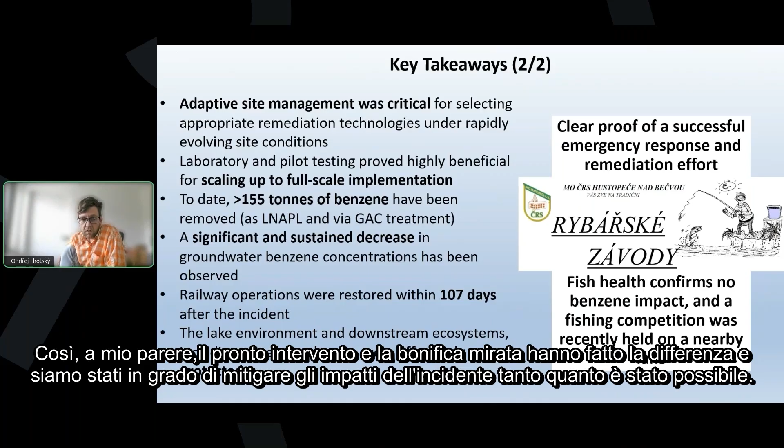And the lake environment and downstream ecosystems were effectively protected. So, in my opinion, rapid response and targeted remediation made the difference, and we were able to mitigate the impacts of the incident as much as it was possible.

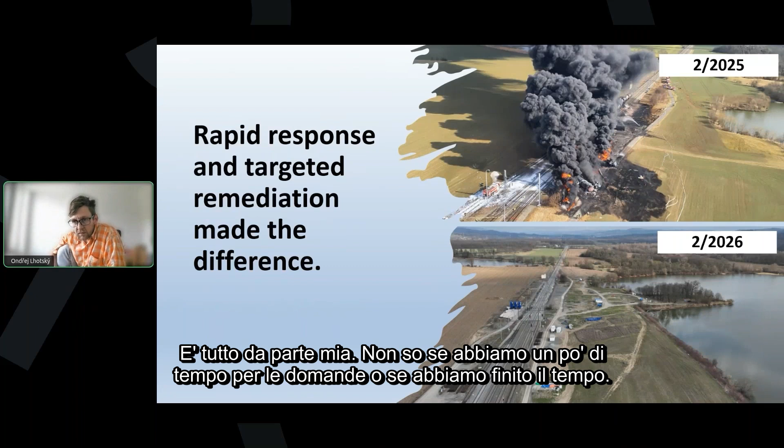That's all from me. I don't know if we do have some time for questions or if we run out of time.